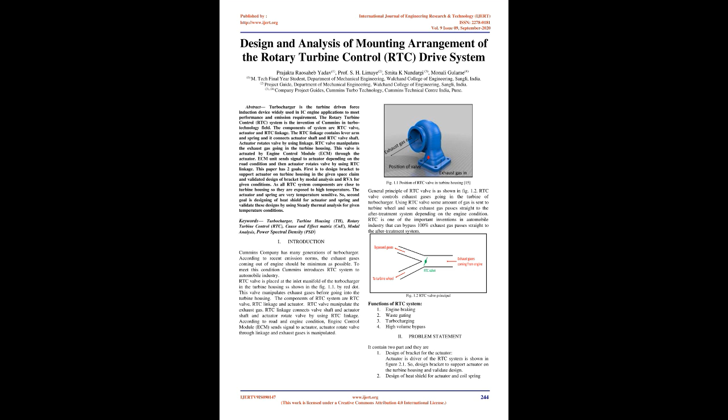The components of the system are RTC valve, actuator, and RTC linkage. The RTC linkage contains lever arm and spring and it connects actuator shaft and RTC valve shaft. Actuator rotates valve by using linkage. RTC valve manipulates the exhaust gas going in the turbine housing. This valve is actuated by engine control module, ECM, through the actuator. ECM unit sends signal to actuator depending on the road condition and then actuator rotates valve by using RTC linkage.

This paper has two goals. First is to design bracket to support actuator on turbine housing in the given space, claim and validate design of bracket by modal analysis and RVA for given conditions. As all RTC system components are close to turbine housing, they are exposed to high temperature. The actuator and spring are very temperature sensitive. So, second goal is designing of heat shield for actuator and spring and validate these designs by using steady thermal analysis for given temperature conditions.

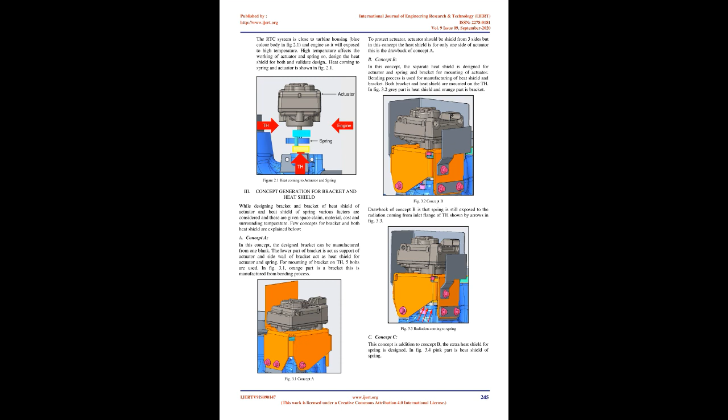Keywords: turbocharger, turbine housing, TH, rotary turbine control, RTC, cause and effect matrix, CoE, modal analysis, power spectral density, PSD. Introduction. Cummins Company has many generations of turbocharger. According to recent emission norms, the exhaust gases coming out of engine should be as minimal as possible. To meet this condition, Cummins introduces RTC system to automobile industry.

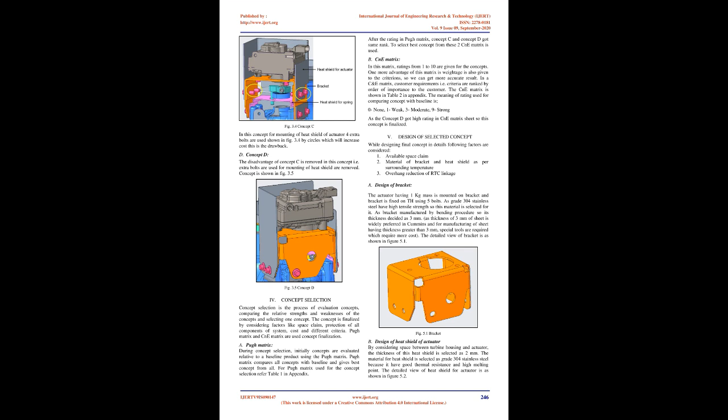RTC valve is placed at the inlet manifold of the turbocharger in the turbine housing as shown in 1.1 by red dot. This valve manipulates exhaust gases before going into the turbine housing. The components of RTC system are RTC valve, RTC linkage, and actuator. RTC valve manipulates the exhaust gas. RTC linkage connects valve shaft and actuator; actuator rotates valve by using RTC linkage. According to road and engine condition, engine control module, ECM, sends signal to actuator, which rotates valve through linkage and exhaust gas is manipulated. General principle of RTC valve is as shown in 1.2.

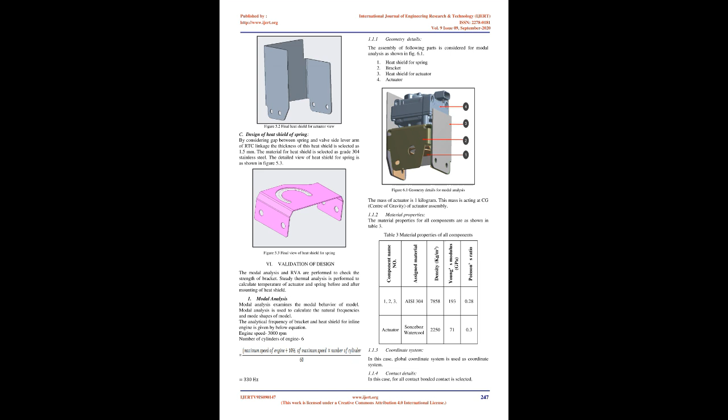RTC valve controls exhaust gases going in the turbine of turbocharger. Using RTC valve, some amount of gas is sent to turbine wheel and some exhaust gas passes straight to the after-treatment system depending on the engine condition. RTC is one of the important inventions in automobile industry that can bypass 100% exhaust gas straight to the after-treatment system. High-volume bypass.

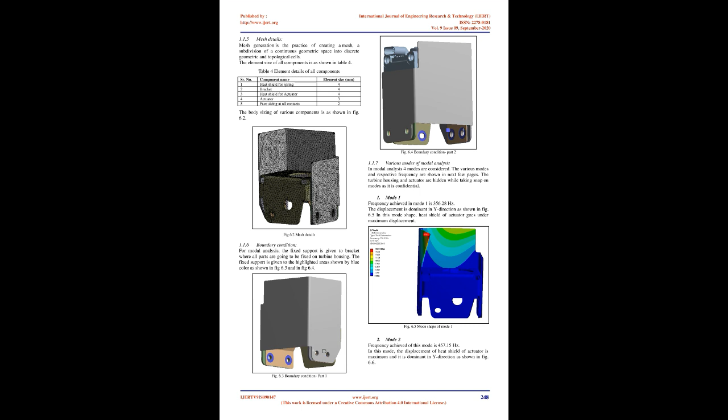2. Problem statement. It contains two parts. 1. Design of bracket for the actuator. Actuator is the driver of the RTC system as shown in figure 2.1. So, design bracket to support actuator on the turbine housing and validate design. 2. Design of heat shield for actuator and coil spring. The RTC system is close to turbine housing, blue color body in 2.1, and engine, so it will be exposed to high temperature. High temperature affects the working of actuator and spring, so design the heat shield for both and validate design. Heat coming to spring and actuator is shown in 2.1. Figure 2.1. Heat coming to actuator and spring.

3. Concept generation for bracket and heat shield. While designing bracket of actuator and heat shields of actuator and spring, various factors are considered and these are given space, claim, material, cost and surrounding temperature. Few concepts for bracket and both heat shields are explained below.

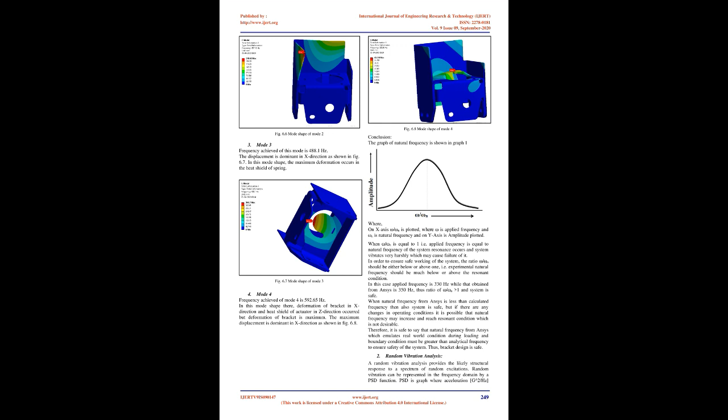A. Concept A. In this concept, the designed bracket can be manufactured from one blank. The lower part of bracket acts as support of actuator and side wall of bracket acts as heat shield for actuator and spring. For mounting of bracket on TH, 5 bolts are used. In 3.1, orange part is a bracket. This is manufactured by bending process. 3.1 Concept A. To protect, actuator should be shielded from 3 sides, but in this concept the heat shield is for only one side of actuator. This is the drawback of Concept A.

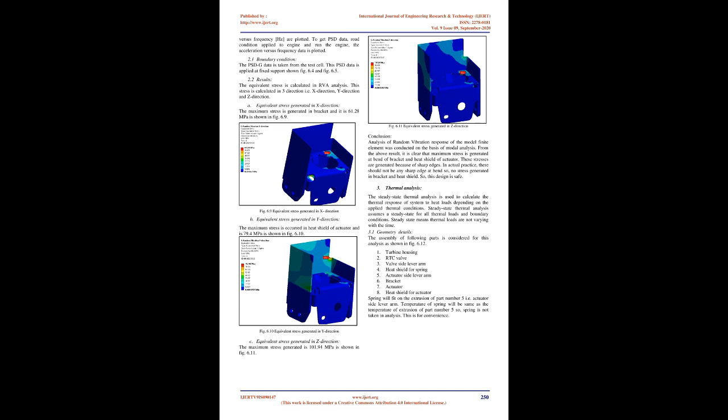B. Concept B. In this concept, the separate heat shield is designed for actuator and spring and bracket for mounting of actuator. Bending process is used for manufacturing of heat shield and bracket. Both bracket and heat shield are mounted on the TH. In 3.2, gray part is heat shield and orange part is bracket.

3.2 Concept B. The drawback of Concept B is that the spring is still exposed to the radiation coming from the inlet flange of the TH, shown by arrows in 3.3. 3.3 Radiation coming to spring.

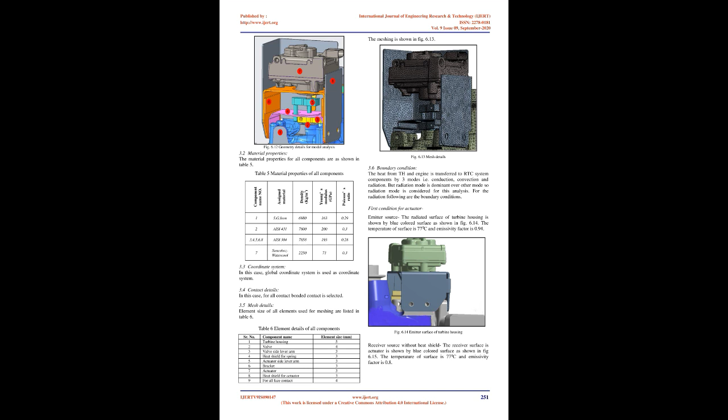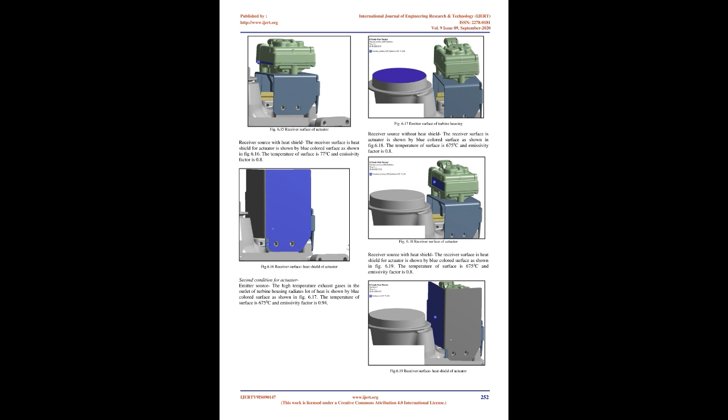4 Concept selection. Concept selection is the process of evaluating concepts, comparing the relative strengths and weaknesses of the concepts and selecting one concept. The concept is finalized by considering factors like space claim, protection of all components of the system, cost, and different criteria. Pugh matrix and C&E matrix are used for concept finalization.

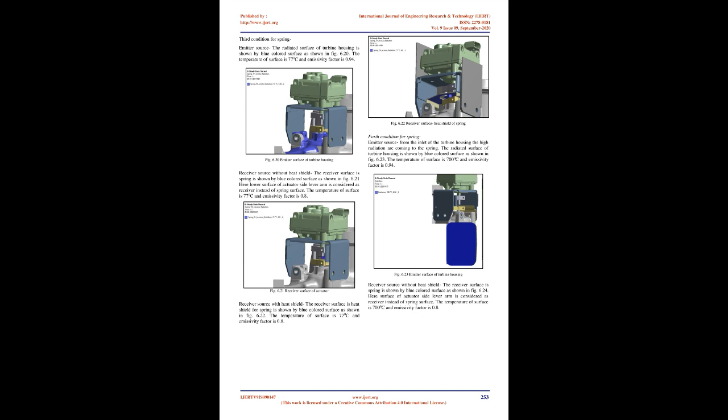A. Pugh matrix. During concept selection, initially concepts are evaluated relative to a baseline product using the Pugh matrix. The Pugh matrix compares all concepts with the baseline and gives the best concept from all. For the Pugh matrix used for the concept selection, refer to Table 1 in the Appendix. After the rating in the Pugh matrix, Concept C and Concept D got the same rank. To select the best concept from these two, the C&E matrix is used.

B. C&E matrix. In this matrix, ratings from 1 to 10 are given for the concepts. One more advantage of this matrix is that weightage is also given to the criteria, so we can get a more accurate result. In a C&E matrix, customer requirements, i.e. criteria, are ranked by order of importance to the customer. The C&E matrix is shown in Table 2 in the Appendix. The meaning of the rating used for comparing a concept with the baseline is 0 none, 1 weak, 3 moderate, 9 strong. As Concept D got a high rating in the C&E matrix sheet, this concept is finalized.

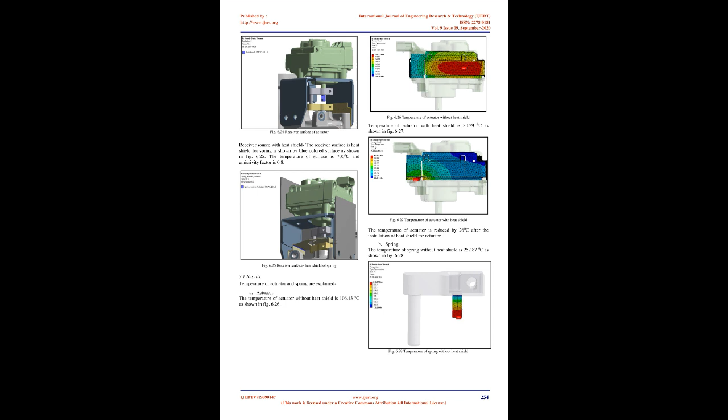V. Design of selected concept. While designing the final concept in detail, the following factors are considered. 1. Available space claim. 2. Material of bracket and heat shield as per surrounding temperature. 3. Overhang reduction of RDC linkage.

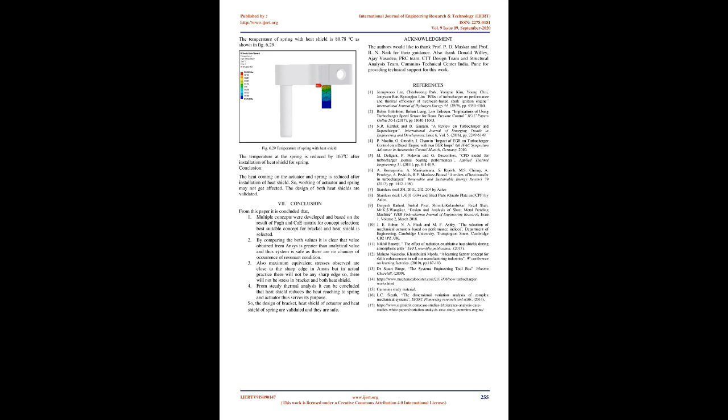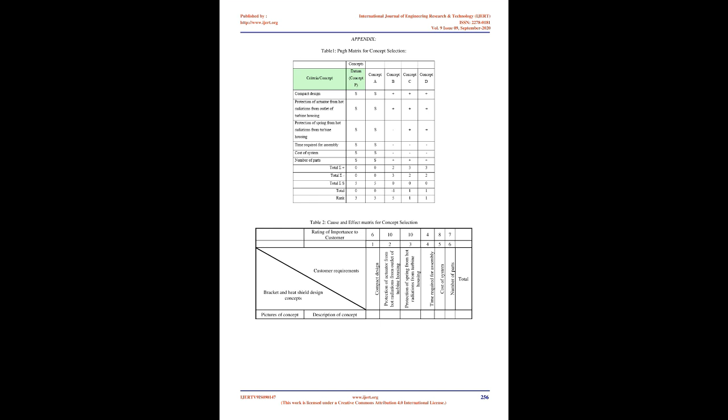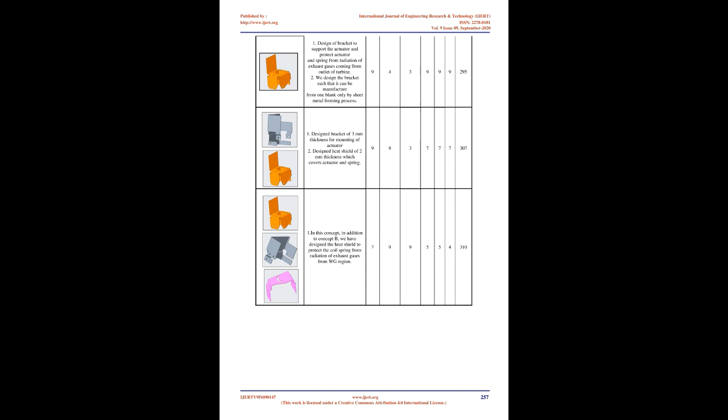6. Validation of design. The modal analysis and RVA are performed to check the strength of the bracket. Steady thermal analysis is performed to calculate the temperature of the actuator and spring before and after mounting of the heat shield. 1. Modal analysis. Modal analysis examines the modal behavior of the model. Modal analysis is used to calculate the natural frequencies and mode shapes of the model.